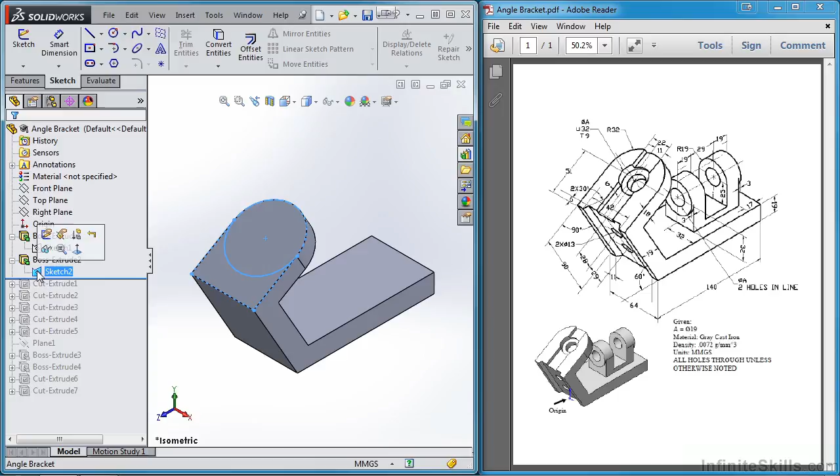If we take the rollback bar, go down one more feature, notice this feature was added. And once again, we can take a look at the sketch. And as we continue, you will see we added a cut extrude, followed by a slotted feature, then a counterbore, next a through hole, then we added 2 holes in this inclined surface, followed by a reference plane. Now this reference plane appears to run right down the middle of this feature that you see back here.

And then we have a tombstone shape, followed by another extrusion. The hole is then placed in the feature, and then they remove the middle. Again, that is just one approach to creating this model. Keep in mind, as you get more experience in the software, you are going to be more efficient. In reality, this part was created by a student early on in their education. So as we step through it, while nothing was incorrect in how they created the model, they did it in many steps. And as you get more experience, like I said, you will find more efficient ways to create models.

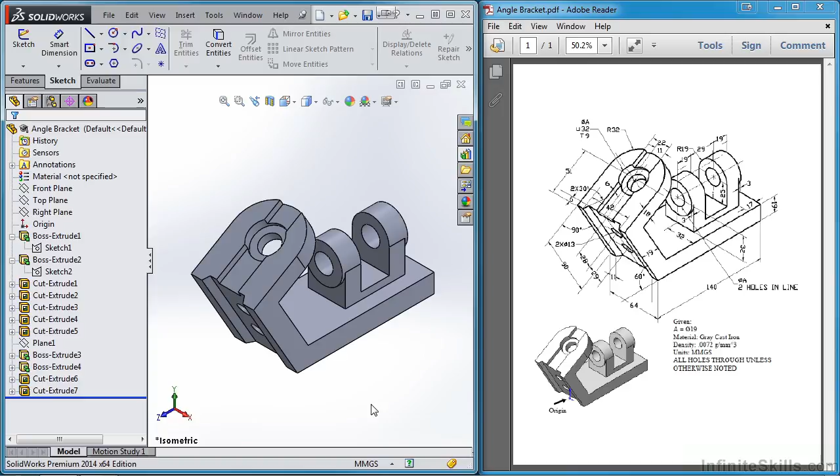So let's begin by creating a new part file. I am going to select New, Part, and then OK. This drawing is in millimeters. Notice it says down here, units, MMGS. So I'm going to verify my units are in MMGS. And now we're ready to get started with our first sketch. So I'm going to go to the sketch ribbon and select the sketch icon. And the first choice I need to make is which plane do I want to create my first sketch on?

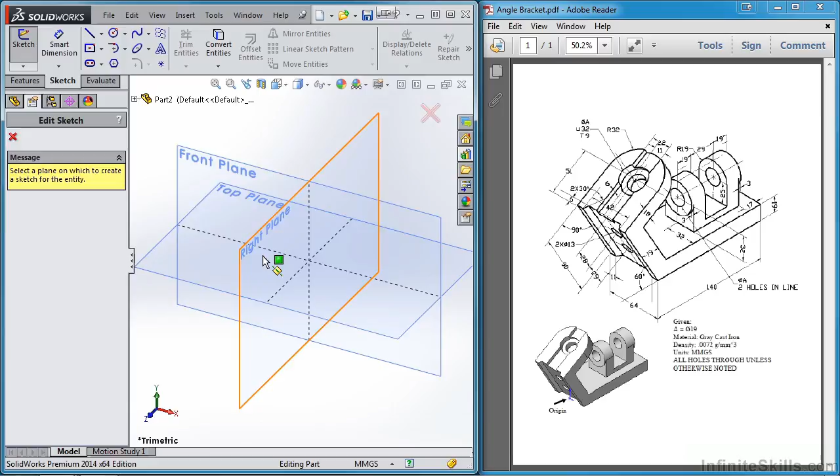Well, I want to create this outline here. But instead of doing it like the earlier model shown, I want to create this entire profile in one sketch. Now, if we look at the origin, it looks like we have a blue axis extending upward and another blue axis extending in this direction. That tells me this is my right plane. So I want to create this sketch of this profile on the right plane. So I'm going to select the right plane, it revolves around, and now I am ready to begin my sketch.

So at this point, you may want to pause the video and then reference the PDF drawing. Create that sketch, define the sketch with geometric relations and smart dimensions, and then extrude the feature about a midplane. Once you do that, return to the video and you can see me step through the same thing.

I'm assuming you have the profile created and extruded. So I'm going to do the same. I'm going to select the origin. Looks like the bottom length is 140. I'm going to go straight up about 19, and then over. Place an incline. And then I want this other incline feature to be perpendicular to this one. So I want to make sure I see that geometric relation added automatically. And then straight up, over, and then back to the origin.

Now, before I add any smart dimensions, I want to look at the automatically added geometric relations. Notice I have a coincident relation. That's good. I then have horizontal, vertical, horizontal. Then I have a perpendicular up here, and a couple more perpendiculars. I also want to see a perpendicular here. So I'm going to hold down the Control key, and then select the perpendicular relation, and then close out of the property manager. Now those are the relations I wanted to see. Now I'm ready to smart dimension it.

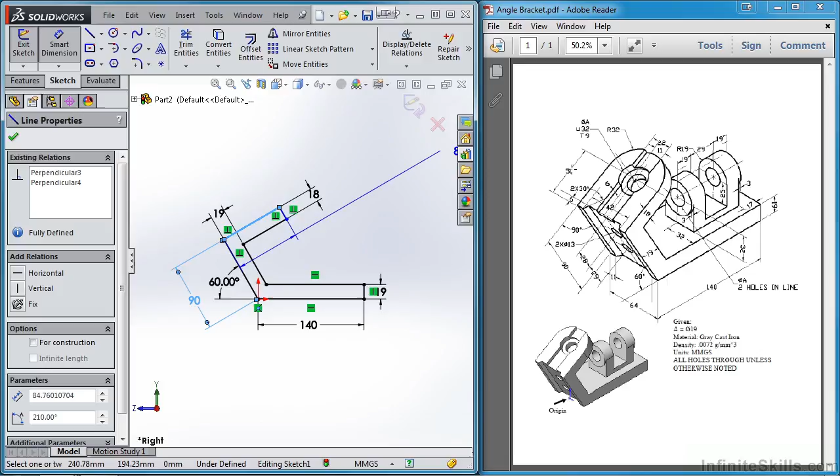It looks like I need to add a 90 dimension for the length of this leg. And then I need to add a length here. Now there's a couple approaches to doing this. You could simply make this length 51 and then add this feature at a later time, or you could add this distance, which is 32, to the 51. I am going to add the two numbers together, which is 83. Now notice the sketch is fully defined, it's all black, and down here in the status bar, it does say fully defined. I'm going to close out of the sketch.

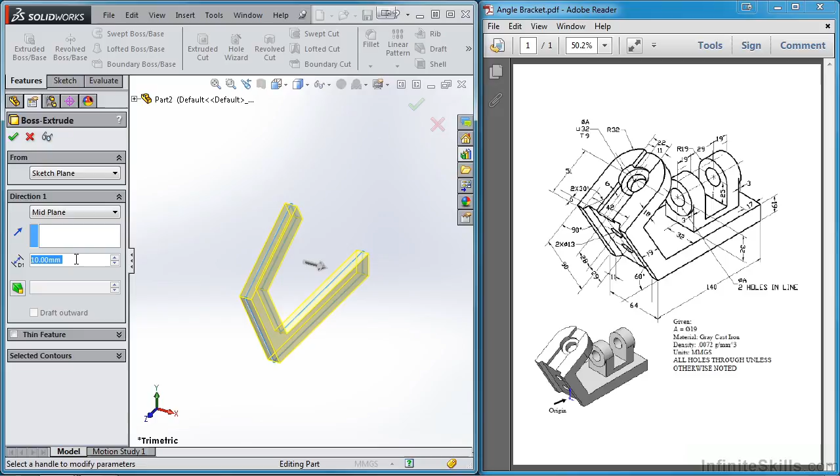I'm going to go to my feature tab, select extruded boss feature, and I do want to extrude this about a midplane, so I'm going to select the drop down and then select midplane. And my distance for the extrude is 64 millimeters. So I'm going to key in 64 and then close out of the boss extrude feature. So that's a good beginning to this part. Let's conclude this part 1 of testing your skills, take a break, then we'll come back and move on with some additional features.